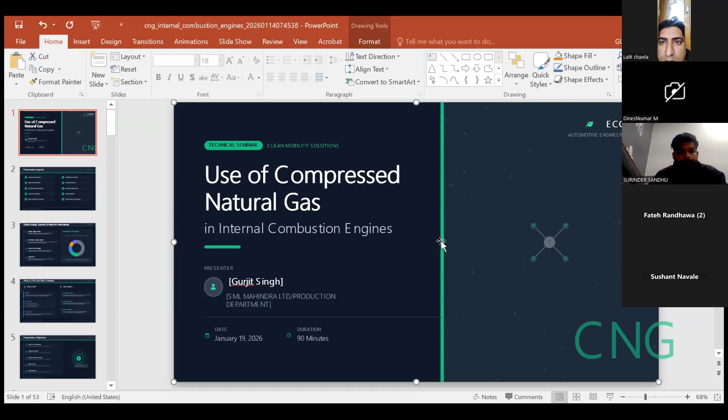One minute, is the slide visible? Yes sir, sure, thank you. So as we will study use of compressed natural gas in internal combustion engine, that's what's about today's topic.

This is our agenda of today's topic: introduction and objectives, natural gas fundamentals, then CNG properties and characteristics. Then we will study fuel system components, engine technology and conversions, combustion and performance, environmental benefits, economics and market trends, safety standards, future outlooks, and key takeaways.

As we all know, fossil fuel reserves all over the world are diminishing at an alarming rate, and a shortage of crude oil is expected in the early decades of this century. So it is believed that crude oil and petroleum products will become very scarce and costly to find and produce. So we require an alternate source for transportation and for fulfilling energy demands. Natural gas, electric, biofuels, and hydrogen vehicles are the alternate sources that we can use instead of oil products. So with rising energy demand, we have to search for an alternate source.

For that, our topic will be natural gas and CNG. So, air quality and climate targets, what is the global energy scenario? As in 2027, the government has switched to Euro 7, which will bring drastic cuts in nitrogen oxide, PM, and CO2, with conventional fuels facing increasing compliance cost.

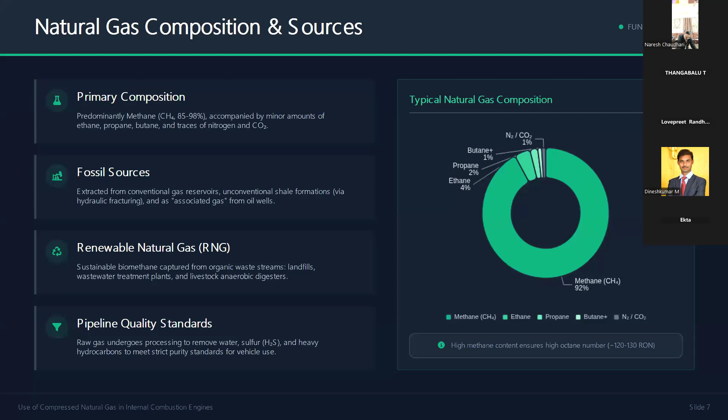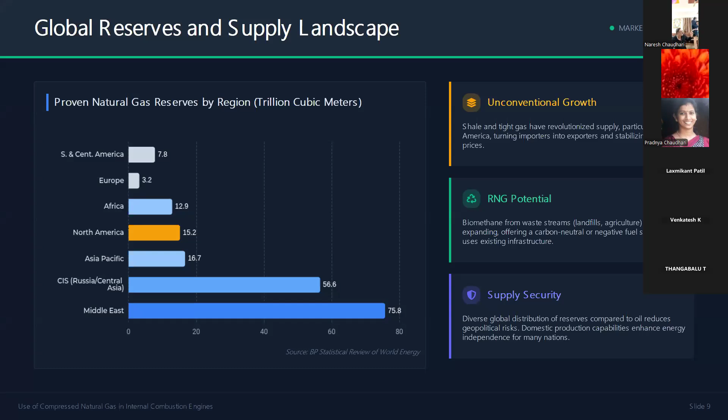Unconventional growth: shale and tight gas have revolutionized supply, particularly in North America, turning importers into exporters and stabilizing long-term prices. RNG potential: biomethane from waste streams, landfills, and agriculture is rapidly expanding, offering a carbon neutral or negative fuel source that uses existing infrastructure. Supply security: diverse global distribution of reserves compared to oil reduces geopolitical risk, and domestic production capabilities enhance energy independence for many nations.

CNG versus LNG for vehicles. What is CNG? Compressed natural gas stored as a gas at ambient temperature under high pressure, around 3600 psi, with a maximum pressure proportionate to 250 bar. It is stored at ambient temperature, meaning neither hot nor cold, a normal temperature but with high pressure.

Ideal application: best suited for vehicles that return to base or operate regionally.

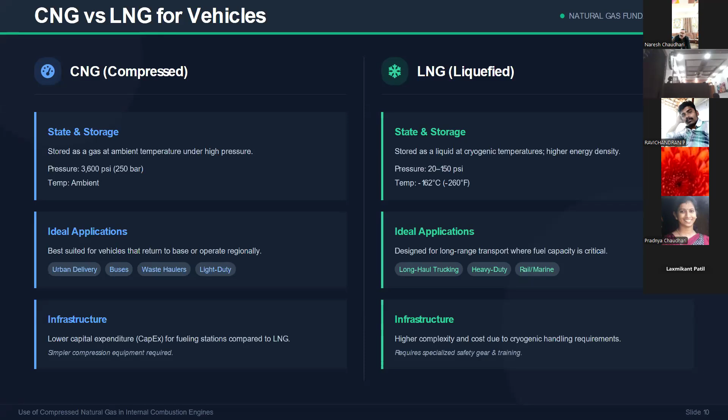Now what is LNG? Liquefied natural gas, stored as a liquid at cryogenic temperature, with higher energy density. Its pressure is 20 to 150 psi, so it has low pressure but high cryogenic temperature around minus 162 degree Celsius. It is designed for long range transport where fuel capacity is critical, requiring higher complexity and cost due to cryogenic handling, so it must be handled very carefully.

Now we study CNG properties and characteristics. Physical and chemical properties: sensory properties show it is naturally colorless and odorless, CNG has no color or smell. A distinctive sulfur compound is added for safety and leak detection. Chemical composition mainly contains methane, with negligible sulfur and zero heavy metals, preventing engine corrosion and catalyst poisoning. It has a narrow flammability range and high autoignition temperature, making CNG inherently safer than petrol or gasoline vapors. Its clean gaseous premix ensures superior air mixing, virtually eliminating soot, unburned hydrocarbons, and particulate formation, making it a clean gas with low pollution. Typical natural gas composition is about 92% methane and 3.5% ethane.

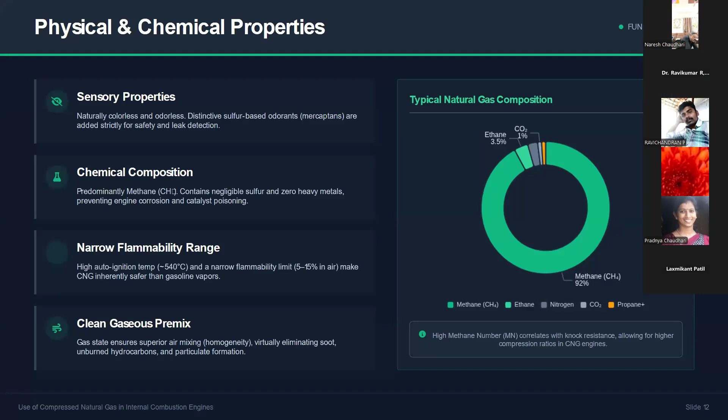Octane and combustion characteristics: higher compression ratio. The high octane rating allows the engine to operate at high compression ratio without pre-ignition, directly improving thermal efficiency and power output compared to standard gasoline engines. So the higher the octane rating, the higher the compression ratio.

If the compression ratio and octane ratio are high, there will be superior resistance to engine knock, permitting more advanced ignition timing strategies. This is crucial for maintaining performance under heavy loads, especially in turbocharged applications. The octane rating of CNG is maximum, like 110 to 130, against diesel and gasoline engines.

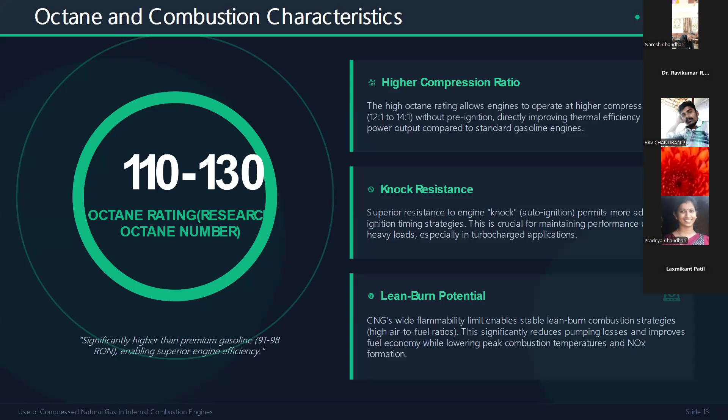Lean burn potential: CNG's wide inflammability limits enable stable lean burn combustion strategies. This significantly reduces pumping losses and improves fuel economy while lowering peak combustion temperature and nitrogen oxide formation. So the flammability limit combustion strategies are so good that the fuel burns properly, and so it lowers the peak combustion temperatures.

Storage pressure and temperature: nominal service pressure. Standard vehicle systems operate at 3600 psi for CNG. Unlike LNG, CNG is stored at ambient temperature, meaning normal temperature, but requires high pressure cylinders to achieve sufficient energy density.

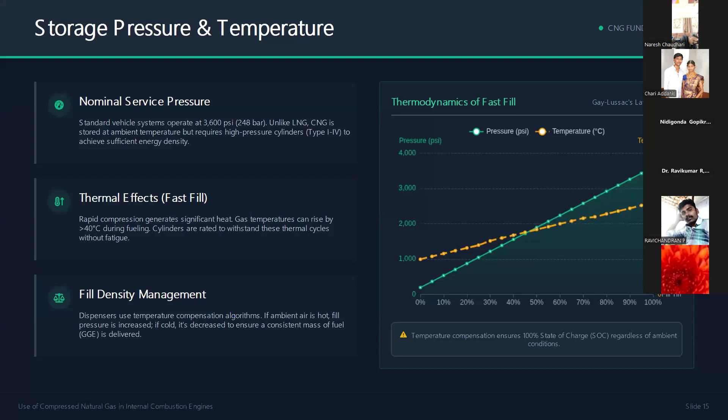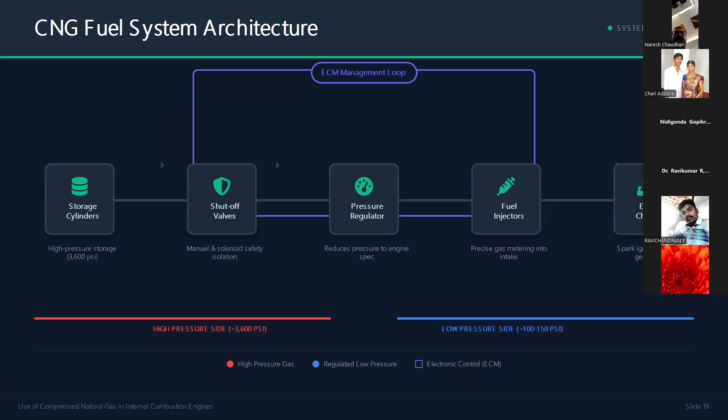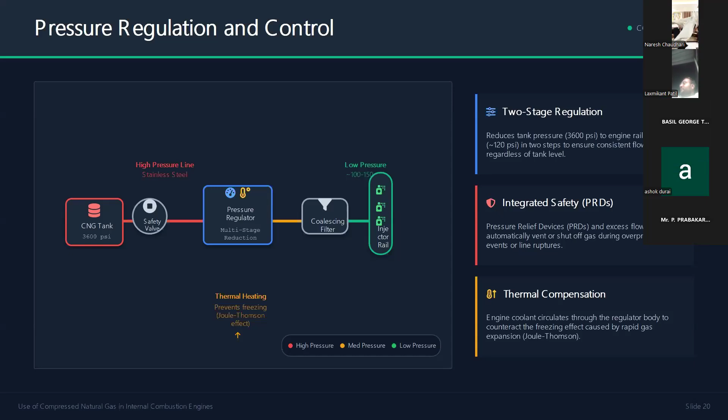Fuel injection system for CNG. There are two engine types, port injection engines and direct injection engines. Let me tell you about port injection. Port injection engines are those in which fuel is sprayed in the intake valve, mixing with air before entering the cylinder. This is a highly proven technology, widely used in dedicated and bi-fuel conversions.

Simple integration into existing manifold designs. It is cost effective, lower system cost due to low pressure requirements and less complex injector designs. Performance characteristics: excellent air fuel homogeneity, power slightly lower peak power due to volumetric efficiency loss. So they are reliable, keep valves clean, but not so efficient.

Direct injection engines are those in which fuel is sprayed directly inside the combustion chamber at very high pressure. This generates high power density, potentially comparable to liquid fuels, injecting gas after intake valve closes, recovering volumetric efficiency. Advanced control gives precise combustion phasing and stratification capabilities, enabling high compression ratio without knocking limitations.

Complexity and cost: more complex injectors need to handle high in-cylinder pressure, requiring high pressure regulation and sophisticated injection strategies. So its cost is high.

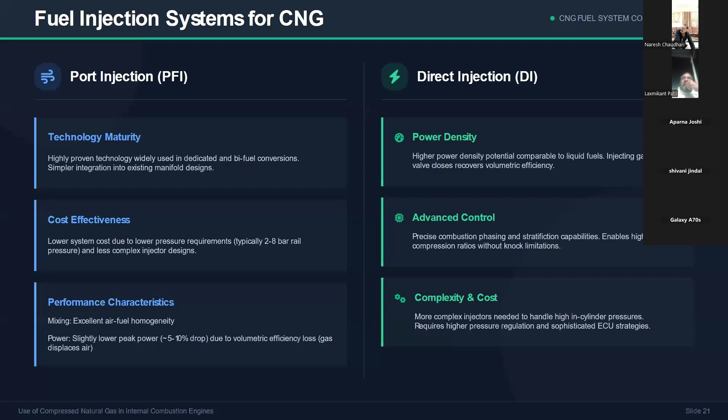ECM, sensors and diagnostics. As we studied before, in direct injection engines this technology uses ECM sensors and diagnostics. What is ECM? Electronic control module. We can call ECM the heart of the CNG engine, which dynamically manages the air fuel ratio, spark timing, and exhaust gas recirculation to optimize combustion efficiency for methane specific properties.

Real-time monitoring: it continuously tracks critical parameters including fuel rail pressure, manifold temperature, knock events, and exhaust O2 levels to ensure safe and efficient operation.

Onboard diagnostic: ECM's function is to integrate diagnostic systems, monitor emissions compliance, detect system faults, and facilitate rapid troubleshooting through standard DTC protocols.

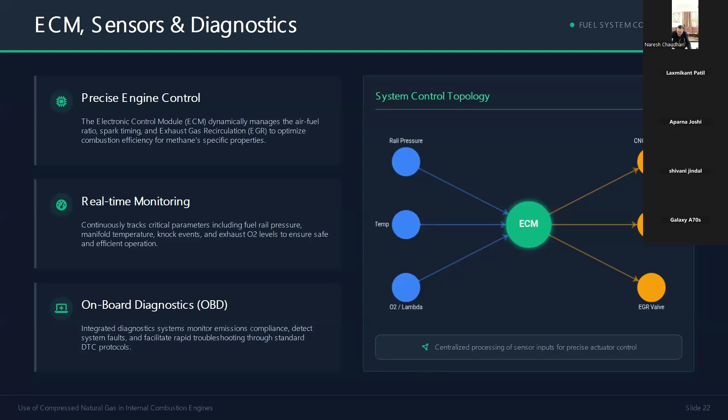What are the hardware components used in CNG engines? High pressure tubing and fittings: the tubes used in CNG are stainless steel or approved material rated for system pressure, with rigid mounting required. Shut-off valves: manual service valves for maintenance.

Automatic solenoids for key-off isolation. Check valves prevent backflow during refueling and ensure directional flow through the system. Fuel filtration: coalescing filters trap oil aerosols and particulates to protect sensitive injectors. Refueling receptacle: NGV1 or NGV2 standard compatible profile, matching dispenser nozzle for safe filling.

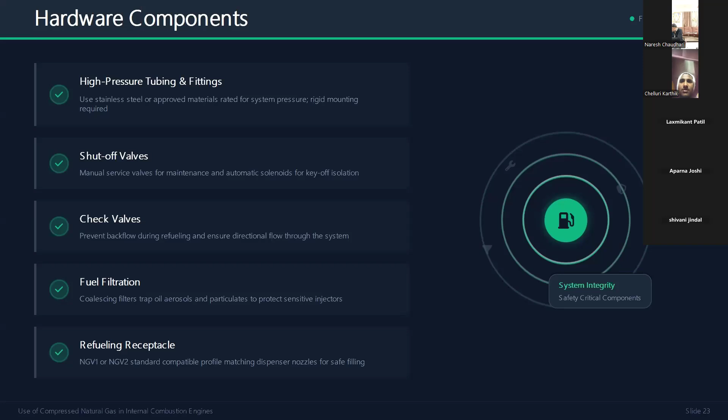Now, engine technology and conversion. We have two types of engines: dedicated CNG engines and converted engines. We will study both, dedicated CNG versus converted engines. What are dedicated engines? Dedicated engines are full OEM integration with vehicle diagnostics, dashboard indicators, and comprehensive manufacturer warranty support.

Engine optimization: dedicated engines are manufactured by the company itself, designed specifically for natural gas with optimized compression ratio to leverage high octane rating, calibration and performance with precise ECU mapping for optimal ignition timing and air fuel ratio, calibrated for maximum thermal efficiency and lowest emission. These dedicated CNG engines offer full OEM integration with vehicle diagnostics, dashboard indicators, and comprehensive manufacturer warranty support.

Converted engines are vehicles originally running on gasoline or diesel that are converted using CNG kits. This offers flexibility and retrofit options, allowing existing gasoline or diesel vehicles to be adapted for CNG use, and offers flexible deployment for diverse fleet types. However, performance heavily depends on conversion kit quality and installation, and may not achieve the same efficiency gains as dedicated engines since conversion kits vary by installation. Still, they offer cost effectiveness with lower upfront capital investment compared to buying new dedicated vehicles.

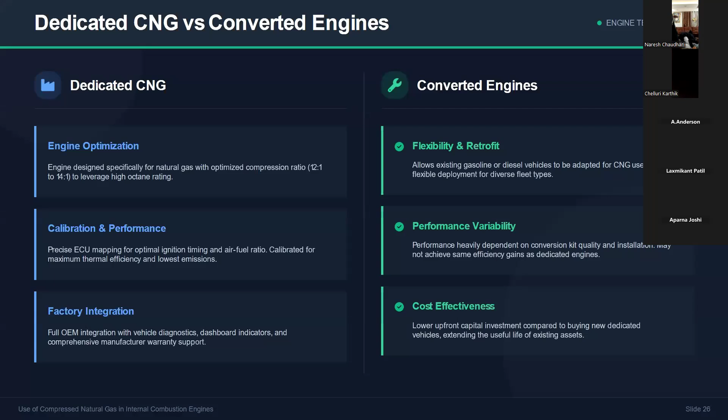Bi-fuel CNG over petrol or gasoline systems use a dual tank architecture: vehicles are equipped with two separate fuel tanks and a driver-selectable switch, allowing seamless transition between CNG and gasoline operation. This extended range and flexibility significantly mitigates range anxiety and infrastructure gaps while ensuring the vehicle can operate on gasoline when CNG stations are unavailable. So these dual tank bi-fuel engines can run on both petrol and CNG. On completion of CNG, they can run on petrol for up to 900 kilometers total, but with only gasoline they can run up to 550 kilometers, and with CNG up to 350 kilometers. This requires sophisticated dual map ECU calibration for optimal combustion in both modes and strict adherence to emission compliance.

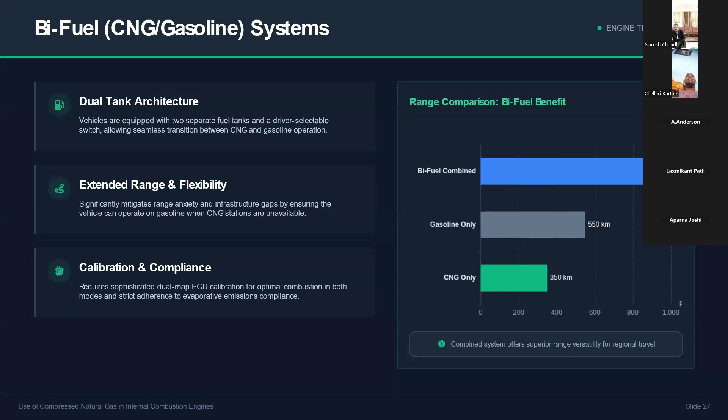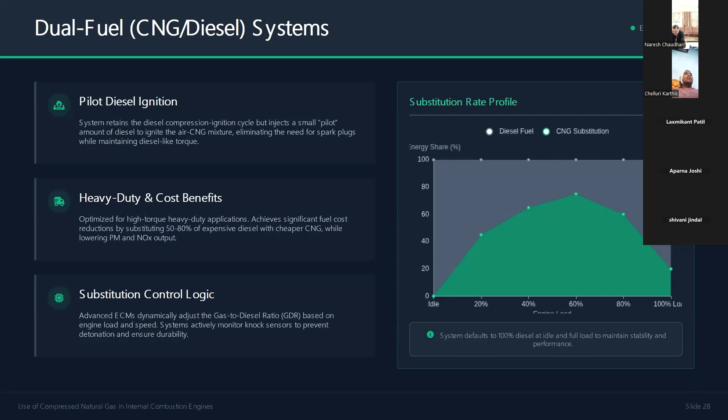Engine modifications: what modifications can be done in CNG engines? Higher compression ratio enabled by CNG's higher octane rating for better thermal efficiency - the higher the octane rating, the higher the thermal efficiency. Ignition system upgrades use higher energy coils and spark plugs sized for lean operation and hard-to-ignite mixtures. Valve train hardening uses specialized valve seats and materials suited for dry fuel combustion without liquid lubrication. After-treatment systems use optimized three-way catalysts for stoichiometric engines to manage specific CNG emissions.

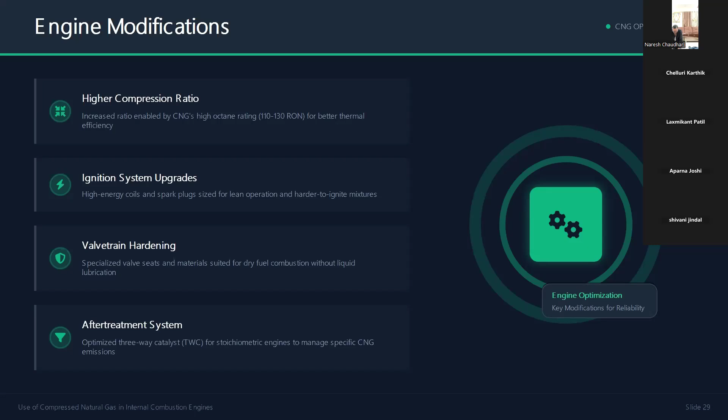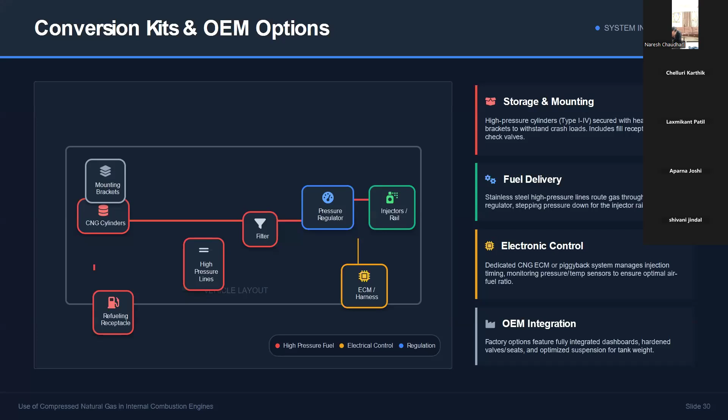Conversion kits and OEM options, as we studied. For storage and mounting, high pressure cylinders are secured with heavy duty brackets to withstand crash loads, including fill receptacles with check valves. For fuel delivery, stainless steel high pressure lines route gas through filters to the regulator, stepping pressure down for the injector rails. The electronic control - a dedicated CNG ECM or piggyback system - manages injection timing, monitoring pressures and temperature sensors to ensure optimal air fuel ratio. OEM integration factory options feature fully integrated dashboards, hardened valve seats, and optimized suspension for tank weight.

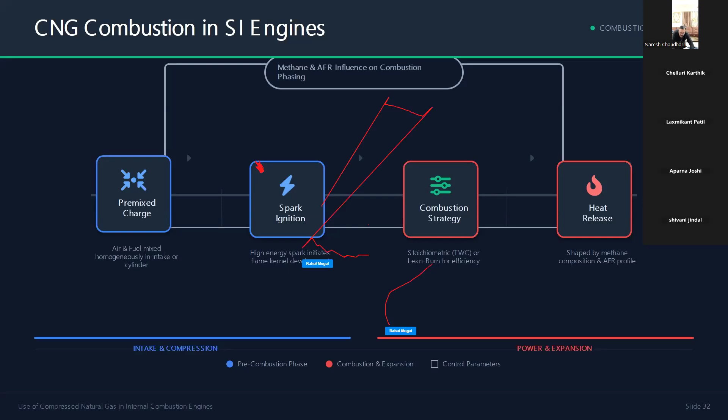Power and expansion: flame speed and ignition characteristics. Methane has a lower laminar flame speed compared to gasoline, requiring high turbulence and optimal mixing quality to ensure complete combustion. Methane also requires higher ignition energy due to its stable molecular structure, so strong spark systems are crucial to ignite lean mixtures and extend the lean limit. Regarding knock resistance and compression, the higher octane rating provides superior knock resistance capability, enabling advanced spark timing and higher compression ratios for improved thermal efficiency.

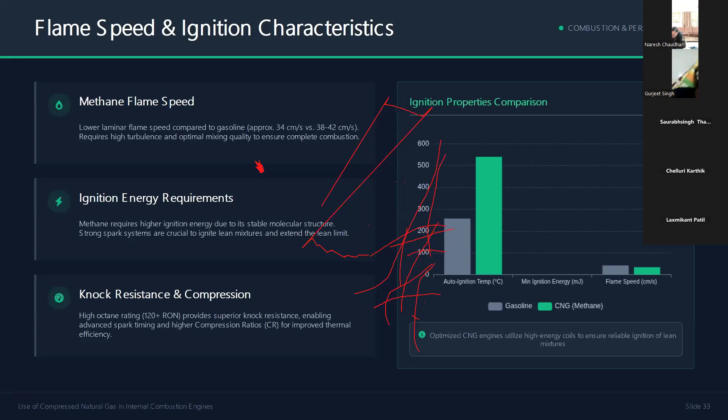Performance wise comparison and evaluation of CNG engine characteristics relative to conventional liquid fuels. CNG peak power is comparable with optimized engines due to high octane, though torque is slightly lower than diesel, requiring optimized gearing or turbocharging to match diesel utility. It is competitive when optimized, since higher octane allows high compression.

Lean burn strategies can exceed gasoline efficiencies, so it is a clean gas. Gasoline or petrol is the reference baseline, with high specific power density and a wide RPM range, so it has high peak power but low torque, typically developing peak torque at a higher RPM compared to diesel.

Efficiency baseline is limited by knock at high compression ratios. Diesel has lower specific power due to lower engine speed limits and combustion characteristics, but it has high torque available at very low RPM, ideal for heavy loads. That's why diesel trucks and buses, which carry heavy loads, rely on high torque.

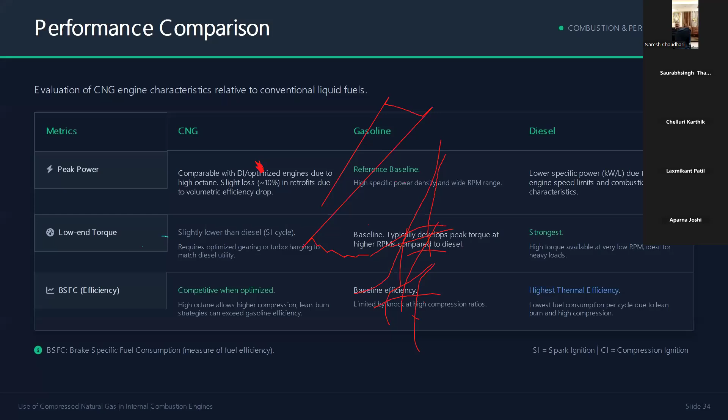Diesel has the highest thermal efficiency and lowest fuel consumption per cycle due to lean burn and high compression efficiency. Thermal efficiency considerations show higher octane efficiency gains: CNG's high research octane number allows for higher compression ratios than gasoline, directly increasing thermodynamic efficiency limits without knocking.

Advanced combustion cycles, implementation of lean burn strategies and Miller cycles significantly reduce pumping loss at part load, improving specific fuel consumption. Reduced heat losses come from optimized combustion phasing and lower peak flame temperature in lean burn modes, reducing heat transfer to cylinder walls and retaining more energy for mechanical work.

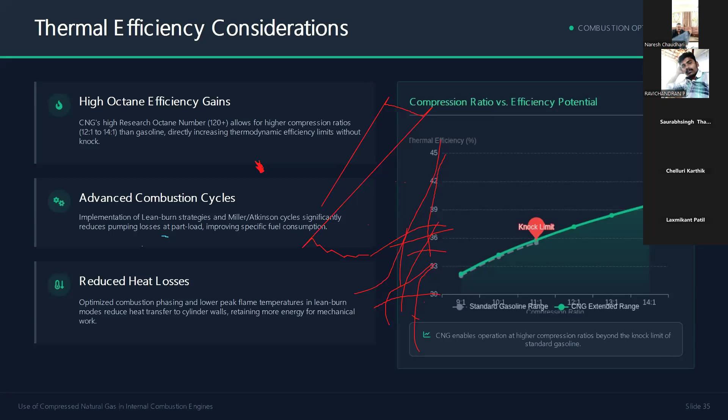Environmental benefits: due to its simpler chemical structure, methane's low carbon to hydrogen ratio means compressed natural gas emits approximately 27% less carbon dioxide than petroleum fuel at the tailpipe.

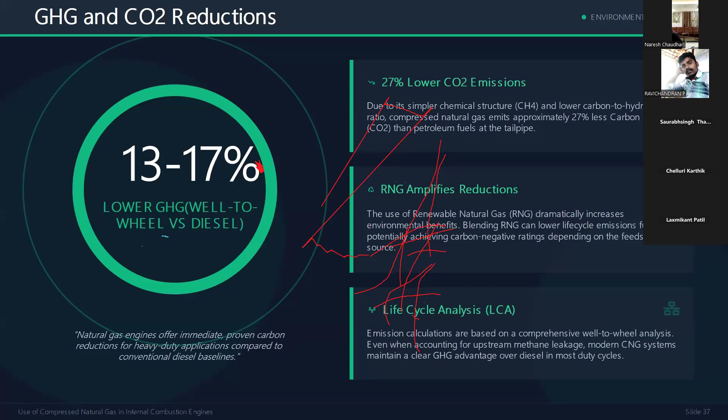RNG amplifies this reduction. The use of renewable natural gas dramatically increases environmental benefits. Blending RNG can lower life cycle emissions further, potentially achieving carbon negative ratings depending on the feedstock source. Natural gas engines offer immediate, proven carbon reduction for heavy duty applications compared to diesel and gasoline baselines, around 13 to 17% less polluting.

Nitrogen oxide and PM emissions are near zero. Modern natural gas engines achieve around 0.02 NOx using standard three-way catalysts, meeting strict CARB near zero optional standards, which are 90% cleaner than current federal limits. Minimum particulate matter results since combustion of methane, a simple gaseous hydrocarbon, produces virtually no soot.

This results in negligible particulate matter emissions compared to complex liquid fuels. Simplified after-treatment: spark ignited engines eliminate the need for complex diesel particulate filters and selective catalysts, reducing system requirements including diesel exhaust fluids.

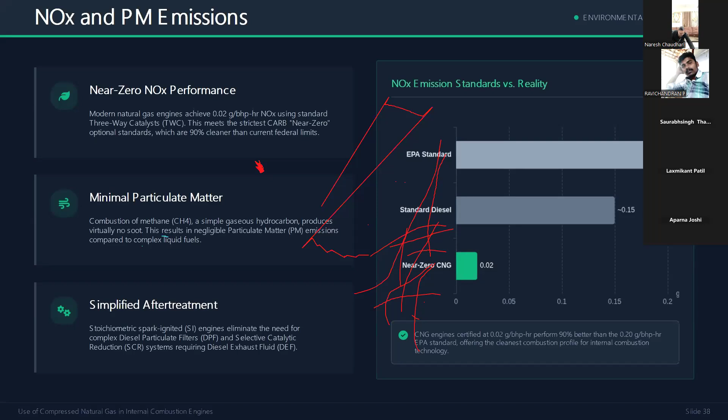This is the life cycle emission and methane leakage consideration. Renewable natural gas benefits from a sustainable production source, produced from captured biogas at landfills, wastewater treatment plants, and livestock farms by anaerobic digestion, turning waste liabilities into energy assets. This is the benefit of renewable natural gas.

Seamless drop-in compatibility: RNG is processed to be chemically identical to fossil natural gas, requiring no changes to existing CNG vehicle engines, storage tanks, or refueling infrastructure, so it can be used as is. Life cycle decarbonization offers significant well-to-wheel GHG reductions; some pathways like dairy manure can be carbon negative by preventing methane release into the atmosphere.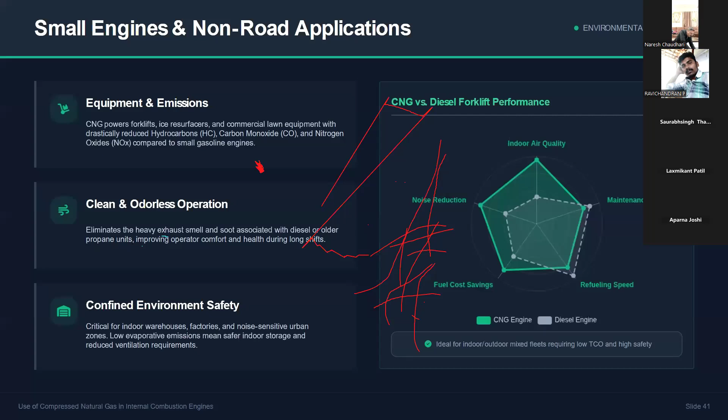Economic analysis: fuel cost comparison. This shows the national average retail fuel price, with 40 to 60% cost savings. CNG consistently offers substantial savings over gasoline and diesel, with natural gas prices decoupled from oil markets.

Fuel expenses remain predictably lower per mile. Price stability: unlike volatile petroleum markets, natural gas commodity prices are historically stable due to abundant domestic supply, allowing for more accurate long-term fleet budgeting. High mileage, high utilization fleets accelerate return on investment, maximizing the benefits of the fuel price differential and offsetting initial conversion costs faster.

This is the price index. Gasoline is priced at $3.55 per gallon, diesel is around $4.10, whereas CNG's price is $2.15, cheaper than both petrol and diesel.

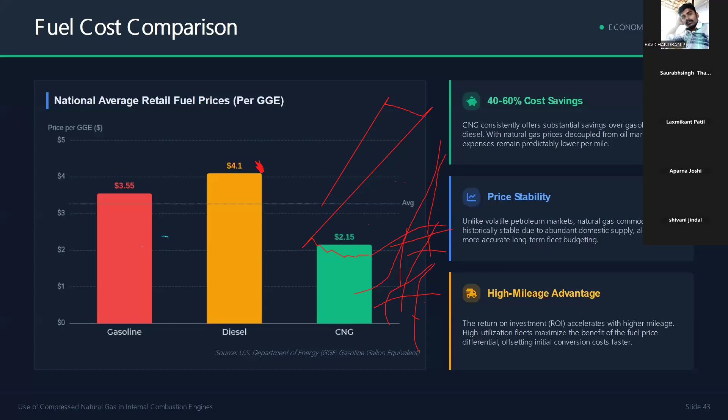TCO: drivers, fuels and maintenance savings. It has a lower fuel cost and reduces after-treatment system maintenance expense, so the system maintenance is also low. Upfront investment and paybacks: initial cost of tanks and conversion kits balanced against ROI timeline.

Residual value impact: market resale value is higher, a consideration for CNG equipped vehicles. Duty cycle element: matching vehicle utilization patterns to maximize economic benefits. So it is economically very easy.

Emission rules and mandates. Strict global emission standards like Euro 7 compel fleet operators to adopt cleaner alternatives. CNG offers a cost-effective compliance pathway for medium and heavy-duty transport sectors.

Renewable natural gas: the scalability of bio-CNG transforms natural gas vehicles into carbon neutral or carbon negative solutions. This significantly boosts the long-term viability and attractiveness of CNG technology for sustainability goals.

OEM integration: major vehicle manufacturers are expanding factory-fitted CNG options. Integrated systems offer better reliability, optimized performance, and warranty coverage compared to aftermarket conversion, driving market confidence.

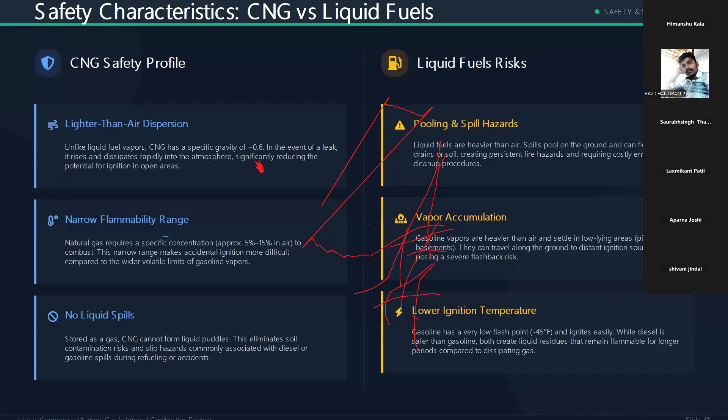Vapor accumulation: gasoline vapors are heavier than air and settle in low-lying areas like pits and basements. They can travel along the ground to distant ignition sources, posing a flashback risk. Lower ignition temperature: gasoline has a very low flash point and can ignite easily, while diesel is safer than gasoline, but both can create liquid residuals that remain flammable for longer periods compared to dissipating gas.

These are the code standards and inspection requirements. FMVSS regulations ensure fuel system integrity during impacts, mandating strict container integrity testing and burst/fire cycling. NFPA 52 standards provide a comprehensive code covering vehicle gaseous fuel systems and CNG fueling facility safety requirements. ISO 15500 series international standards specify performance and testing for individual CNG fuel system components like valves and regulators.

Cylinder inspections: mandatory visual inspection every 36 months or 36,000 miles, whichever comes first, and immediately after any accident or fire, you have to inspect your cylinders.

Station safety and best practices. Trained operators and pressure verification ensure personnel competence and verify 3000 to 3600 psi compatibility before filling. There should be a trained operator for pressure verification and pre-fill inspection: check nozzle and receptacle conditions and listen for leaks. Before filling, you should check nozzles, O-rings, and debris, and listen for any leaks.

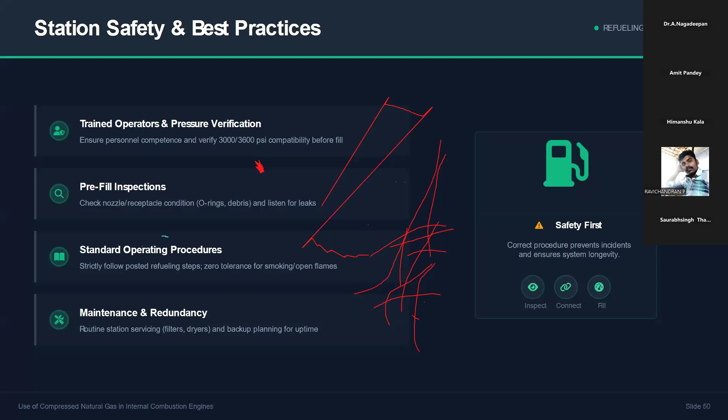Future trends and conclusions, these are the future outlooks and trends. Bio-CNG and RNG scale up: transition to carbon negative pathways by leveraging renewable natural gas from organic waste and digesters. Digital integration: implementation of smart sensors, telematics, and real-time leak detection for enhanced safety and predictive maintenance.

Advanced storage technology: adoption of type 4 composite cylinders and advanced manufacturing to reduce vehicle weight and system cost. As discussed, type 4 cylinders are lighter in weight, reducing vehicle weight and system cost. OEM and hybrid concepts: expansion of factory-fitted CNG options and development of hybrid CNG powertrains for optimal efficiency.

Key takeaways: cleaner and cost effective. CNG enables significantly cleaner internal combustion engine operations with near zero nitrogen oxide emissions while delivering operational cost savings. It is a mature technology backed by proven components, established safety standards, and an expanding global refueling infrastructure. Strong TCO and RNG future offers compelling total cost of ownership for many duty cycles, with carbon negative potential when paired with renewable natural gas energy.